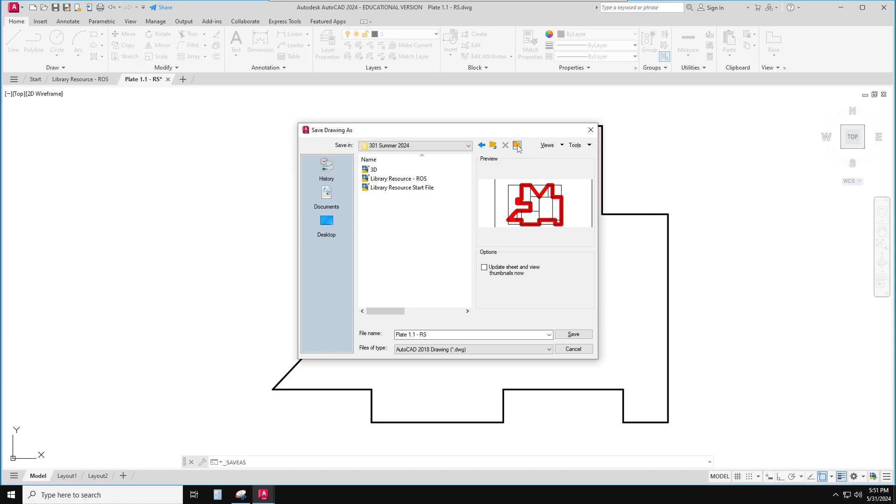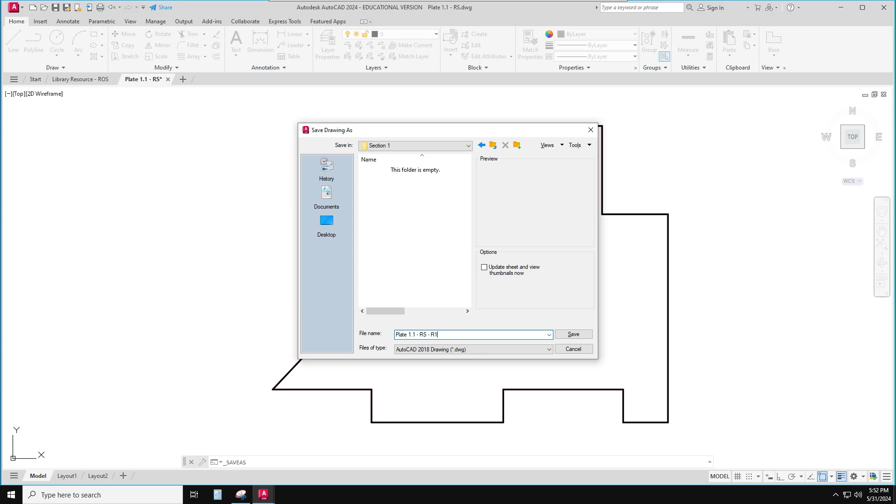So that's what I'm going to do. I'm going to open up my Plate 1.1 and then do a save as. Let me get it into the right place—it's my summer 2024, and I might get something here called section 1. Nice to have everything in a folder. So this is Plate 1.1-RS-R1, revision number 1. That's the very first thing you do—you make a new file.

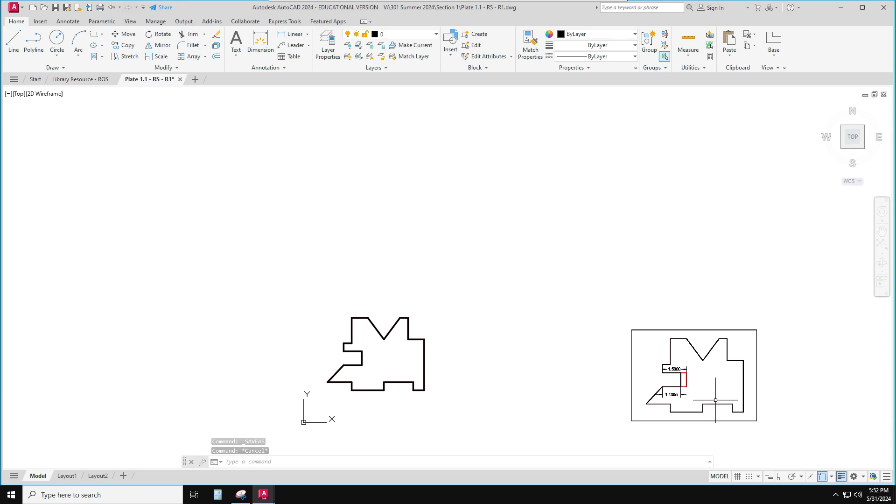Now my old file is still safe, it's there, I can go back to it if I want. But this is now the one where I'm going to be doing more work. And then it says make any revisions—revise the file. So you would go back to Canvas and find out if there was a drawing that showed something that was wrong.

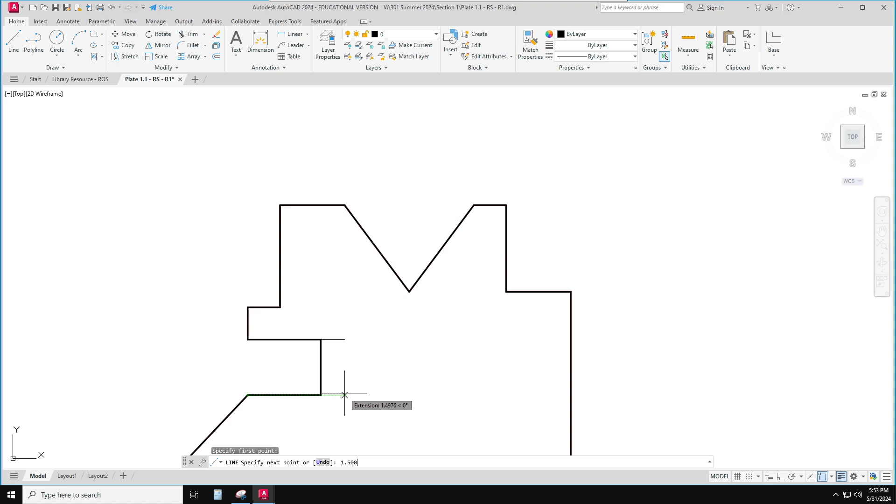Red in those drawings is the correct one, and this is what mine is at. So I could probably put that measurement on there—I need that to be 1.5. I've gotten better at drawing since I did this, so I'm just going to draw a new line. 1.500. And then I'll come down. I'll do the same thing over here, 1.500. And then I'll go up.

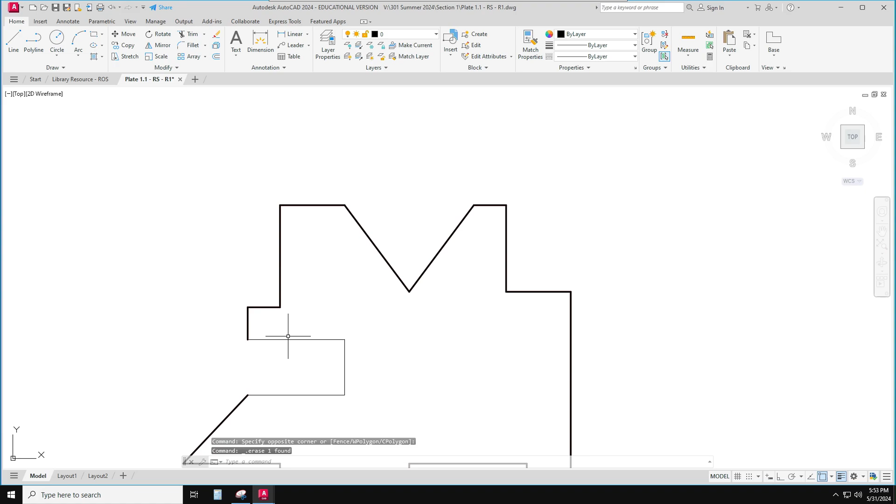And then I'll get rid of that old line. It's okay with me if I've got a line over the top of another line, but if I want to get rid of one of those lines, I can do that—I can encircle just that line and hit delete. So there we go. Now I see that these are all thin.

So now it's time to load my layers, my dim styles, my text styles into the file, and then assign these to the geo layer. Remember, we just went through a whole bunch of stuff, and gosh, I don't want to do all that work again.

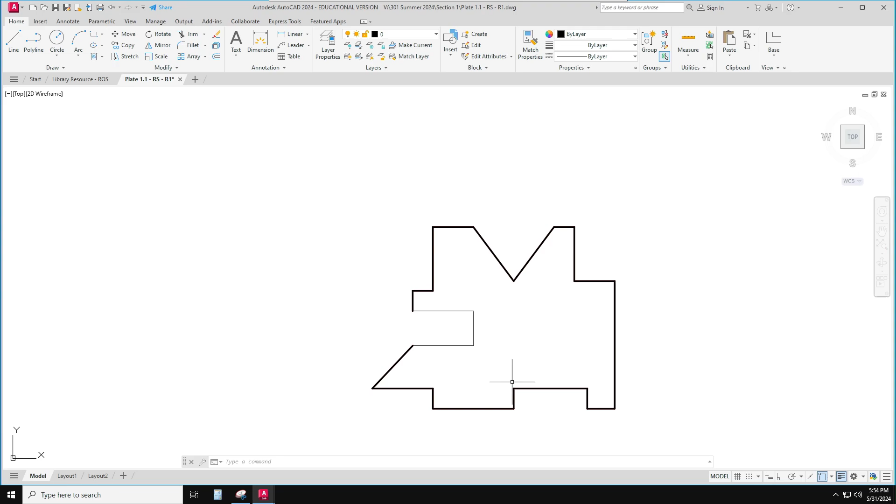So I'm going to type DC for the Design Center, and I'll look at my open drawings, and there they are. I'm going to dock it over to the side, pull it over, and let it go on the side. Now I need to make sure I'm in my current drawing, Plate 1.1. This is showing open because I need to get to it.

In my Design Center, I need to make sure that the one that's expanded is the library resource. There's a lot of details to cover here, so go slow and pay attention to each one. It says to load my layers, and make sure you've got the geo layer in each one. Let's see if the geo layer is even in here. Nope, I need the geo layer.

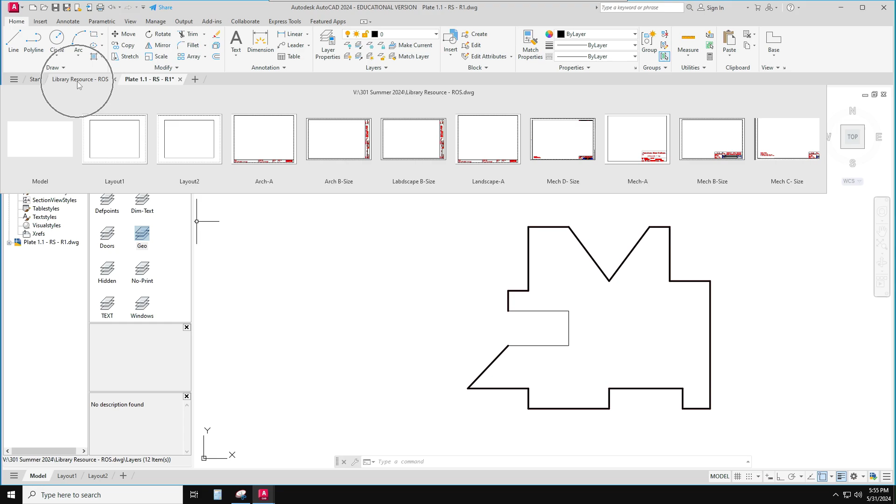So I've gone to my Design Center, clicked open drawings, and opened my library resource drawing. I double click on my layers, and there they are - there's geo. I'm going to use my left mouse button, hold it down, drag it into my revision file, and let go.

Now if I go up to my little layers window and click on it, there's geo. Here's how to assign these layers, these lines, to the geometry layer. Select the lines - I went right to left, so I just have to touch each one. Go up to the little layer window and click on geo.

There we go. Now they're all - I might as well put them all on the geo layer. There we go.

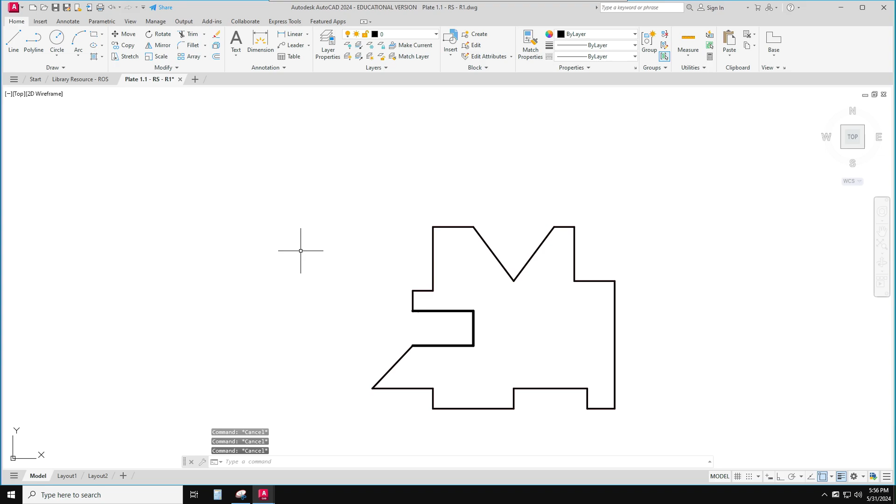There's another way to do that if you want - I'm going to show you another way. Go right click out in this area, click on those three lines, right click on them, and find the properties.

And then the color is by layer, and the layer is geo. And my line weight is by layer. There we go, that's how we do all of those.

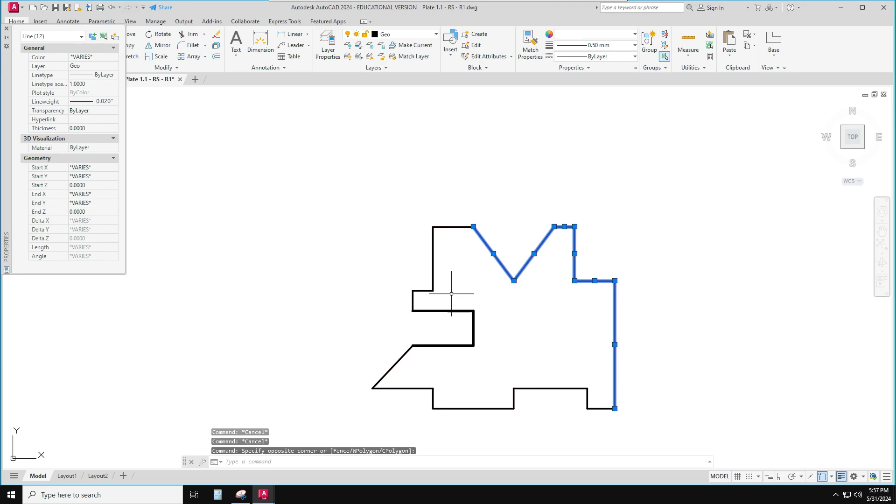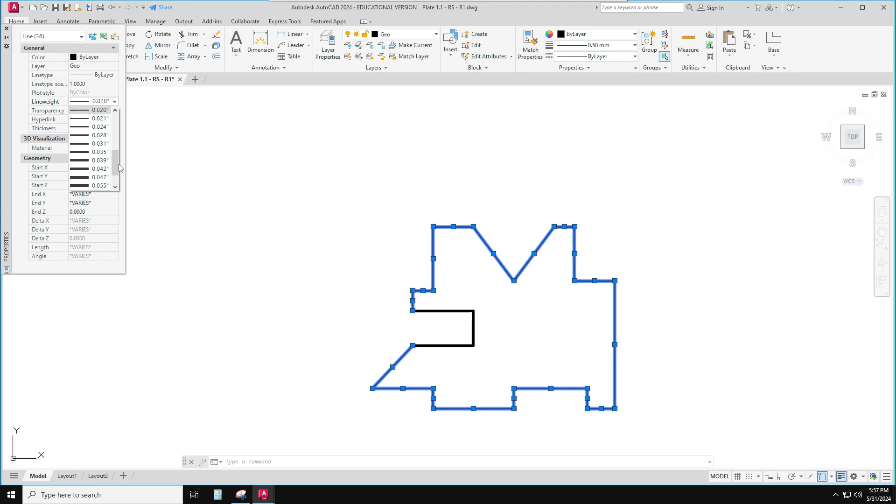Now look, these ones have some weird line weight. I've got to get all of those to say by layer. So I did something really weird when I drew this at the start, and that can happen to you. You want the colors to all say by layer, everything should be on the geometry layer, and the line weights should say by layer. Now everything is right.

And the reason I'm showing you these is, we didn't really take any care when we first drew it - anything could have happened. So now we're showing you how to make your drawing meet a set of standards. It's commonly done at the start of any kind of project where you get somebody else's drawing.

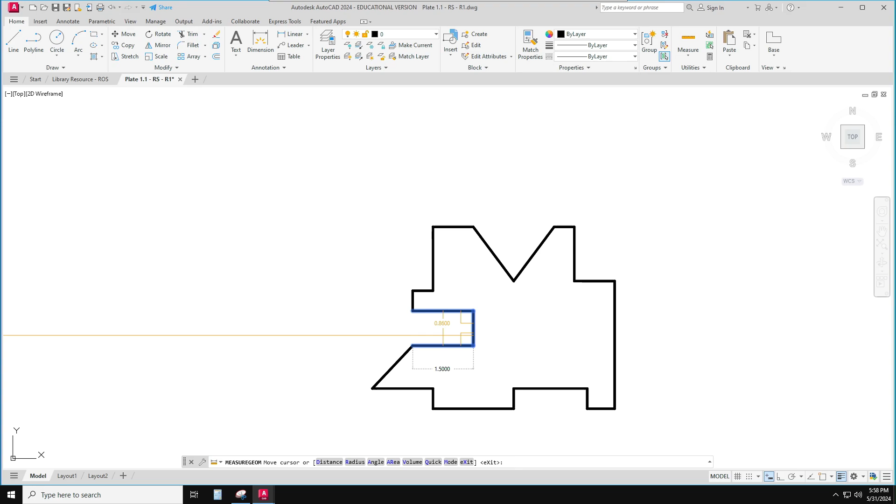Okay, so there we go. That is the revised drawing, and this should now look right. You can measure some lines - 0.86 by 1.5, or over here, or on the top - so you can do that. Or you can type the letters DIST for distance and make sure that you've got it right.

At this point I do not want to see a whole bunch of dimensions on here, but if you want to just check it out, you can put a dimension on there and then delete it. So those are all things that you can do.

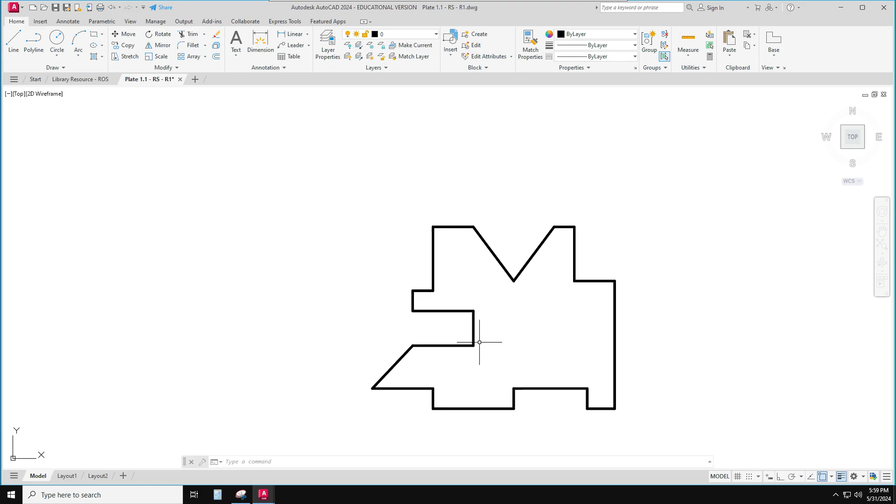So I've made my revisions. I'm only going to show this to you on Plate 1.1. You'll do the same thing for all plates that need revision. You'll go back, look at the notes from Canvas where you were given markups or directions, and then do your best to get the drawing corrected. Once it's corrected, you'll put things on the correct layer, and then you'll save the file with an R1 at the end.